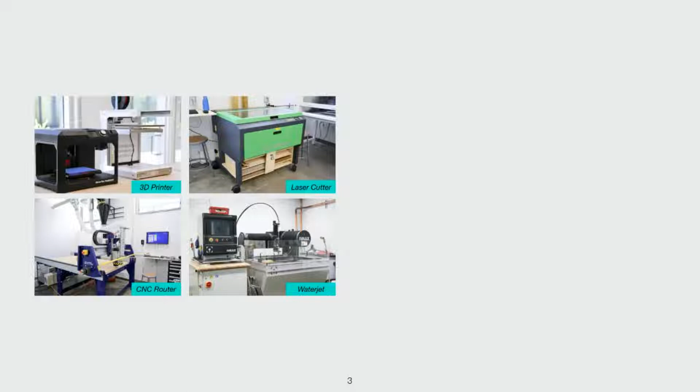So starting with the high-level motivation, the promise of digital fabrication was that given these tools like 3D printers, laser cutters, or CNC routers, plus the imagination that you already had, anyone can make almost anything. These things can be useful, playful, but ultimately it's about being creatively engaged to make these personally meaningful artifacts. And of course, there's practical benefits to this approach as well. Using one of these machines like a laser cutter or CNC router, users can make complex geometries accurately and automatically.

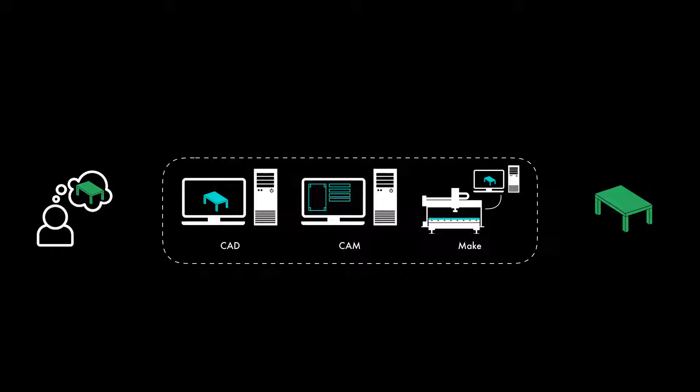But of course, there's a catch. So in order to go from the idea of an object to fabricating that object, a maker must navigate a gauntlet of software packages to first draft a digital model, devise a toolpath for manufacturing, and drive the fabrication machine itself. So these software pipelines are super functional and mature, but they can generate an enormous amount of overhead and friction for communicating design intent to a fabrication tool.

So if you're making 1,000 of the same thing, that overhead is perhaps less of a concern because it can be amortized over all of the copies. But the thing is, this workflow is approximately the same whether you're making 1,000 copies of an object or just one of those objects. So the challenges of using this workflow have motivated a lot of work in digital fabrication research.

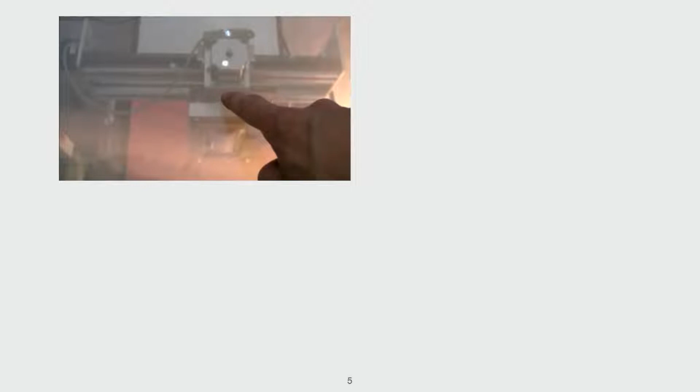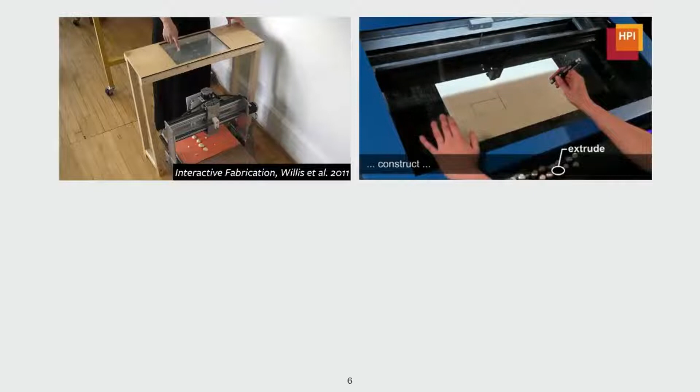Some of the most well-known works in this area are interactive fabrication, which showed how users can directly and continuously interact with fabrication tools. So this was one of their prototypes where a user could use a transparent touchscreen at the machine itself to tell it where to go. There's also interactive construction, which allowed users to design and fabricate assemblies directly at a laser cutter. So users draw with different laser pointer tools to communicate the type of geometry they want to make at the machine.

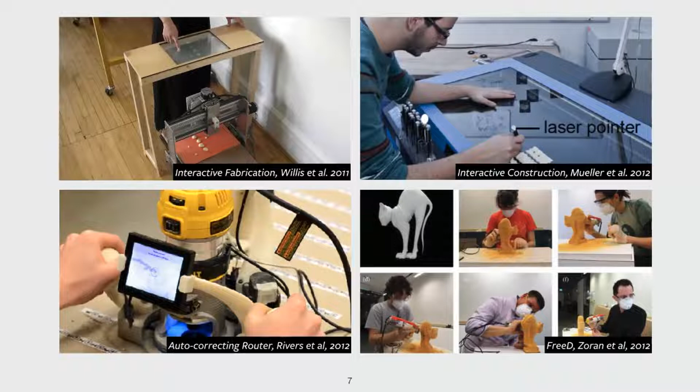And also, there's been research in augmented hand tools that can correct the user's position with respect to a predefined model. So that's been explored both for planar materials with visual fiducials for position tracking, as well as 3D sculptural objects with magnetic sensing and position tracking. And you may be more familiar with the autocorrecting router as Shaper Tools, which is the company that emerged from that research project.

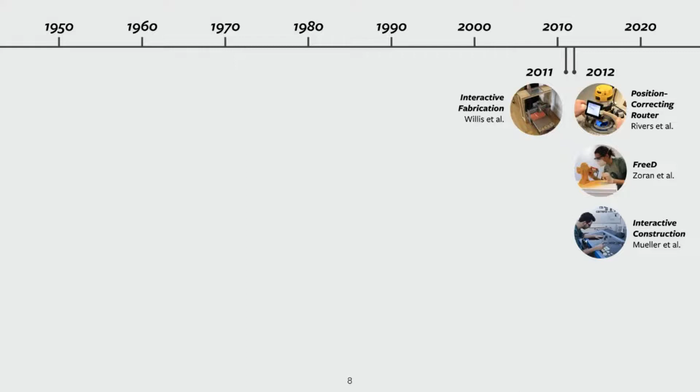So how do you get a punch card to drive a machine? But here, now they're starting to think about what's kind of the precursor to computer-aided manufacturing. So how can those toolpaths be automatically generated or compiled? So with this longer history of digital fabrication in mind, I wanted to call out two pieces of really relevant early work that aren't mentioned very often in the human-computer interaction community.

And this was something that was invented by Hurco in the late 70s. And nowadays, most machine tool manufacturers have some style of this control. And if we look back at the original patent, this technique was, funnily enough, referred to as interactive machining. And as we can see from the description, the inventors of the system were also thinking about how part programming, or the process for defining what and how the machine should fabricate, could be done by the operator at the machine location.

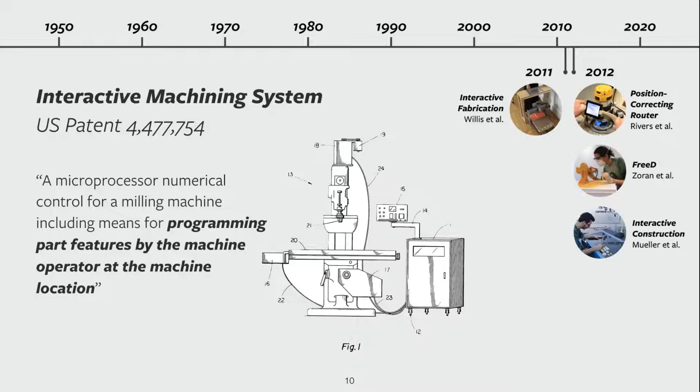The second piece of related work that I wanted to share is something called record playback, which was developed roughly around the same time as numeric control. So this was even earlier in the 1950s. And to me, this is one of the most interesting pieces of related work. So record playback did just that. The system recorded a machinist's actions as they're cutting as a means of generating the toolpaths that can be played back automatically. And because it's a manual tool, the way that you generate the toolpath is more direct, more flexible, and it leverages the existing embodied knowledge of the machinists. And not to mention, you get a part immediately after quote unquote programming the toolpath.

So I think you'll note that there's some pretty fundamental differences between how numeric control, writing punch cards, and record playback approach the question of how to incorporate computation into fabrication tools. So commenting on those differences, James Fallows in his review of Forces of Production writes, with numeric control, machinist skills were devalued and viewed as little more than a series of straightforward operations. But record playback programming was, as one proponent described it, programming by doing.

The program, therefore, was a record not only of the machine and stylus motions, but also of the machinist's intelligence, skill, tacit knowledge, and judgment, which were embodied in those motions. Rather than viewing the possibility of human intervention cynically as merely the chance for human error, this approach viewed it positively as the opportunity for human judgment, skill, and creativity.

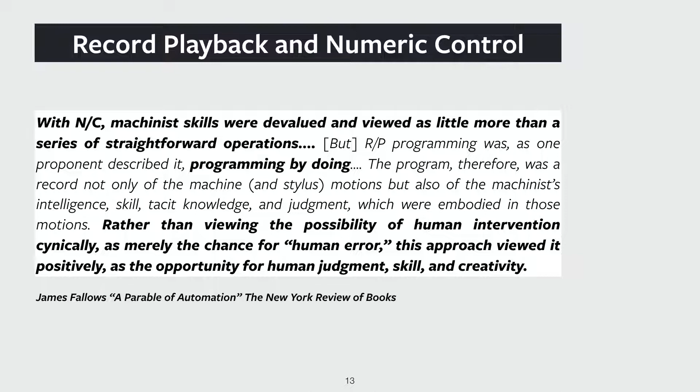So though these projects are not as well known, these early works occupy a lot of the same conceptual territory as these more recent projects. For example, how can a user work with a digital fabrication tool more directly? Or alternatively, how can we leverage the familiarity of hands-on control? And in hindsight, these similarities aren't too surprising. They're all trying to grapple with that same fundamental question around how can or how should users interact with the computation that's being incorporated into these tools.

So moving from related work to my own work, I'm similarly interested in reducing the viscosity of conventional digital fabrication workflows. And to do so, my exploration in this space is guided by this high-level research question: How can digital fabrication tools engage opportunities for human judgment, skill, and creativity during the fabrication process itself? And this question is very much inspired by those earlier hands-on approaches that we talked about.

So this work is not about more intuitive computer-aided design or computer-aided manufacturing tools, nor is it about less opaque machine interfaces, though those are important questions. But rather, it's about how the fabrication tools themselves can be designed to support the fact that hands-on making is this really interesting site of creative exploration and problem solving.

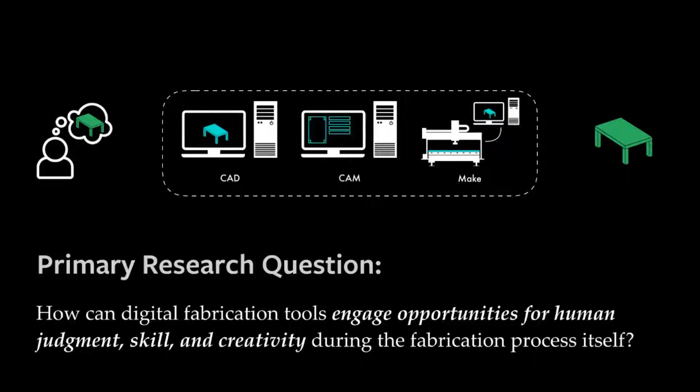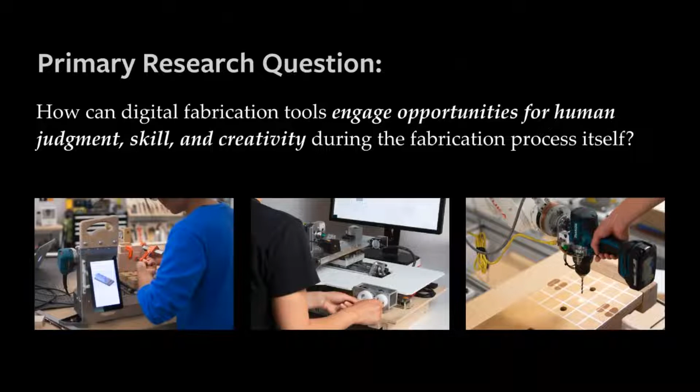And methodologically, I build interactive systems to explore these ideas. And in this talk, I'll share 3 complementary approaches that allow makers to bypass these conventional workflows while still maintaining many of the benefits of digital fabrication.

Okay, I'll briefly check the chat before going to MatchSticks.

So the first project that I wanted to talk about is MatchSticks, a fabrication system that was designed specifically for woodworking joinery. And the main question that guided this work was, how can design intent be more directly communicated to a CNC tool for woodworking? So compared to how we would use other tools in a wood shop, like say a drill press or a table saw, CNC machines and their associated workflows feel uniquely out of place. We were interested in capturing some element of how we can work directly and fluidly with these manual tools, but that doesn't necessarily mean that the tool has to be operated by hand.

And this project focuses on one aspect of woodworking in particular, which is joinery. So many larger wooden objects and structures are made by assembling separate pieces of wood. And as a result, one crucial element to figure out is how exactly those separate pieces of wood will interface with each other.

With those goals in mind, we created MatchSticks. First of all, this work is very much in the spirit of interactive machining. So users can select a joint to fabricate directly at the machine. Second, not only are the interactions focused on joinery, the mechanical layout of the tool itself has also been tailored for the specific constraints of machining joinery. And because we're focusing the capabilities of this tool on local geometries rather than trying to mill out the entire object, it can make objects much larger than the machine itself.

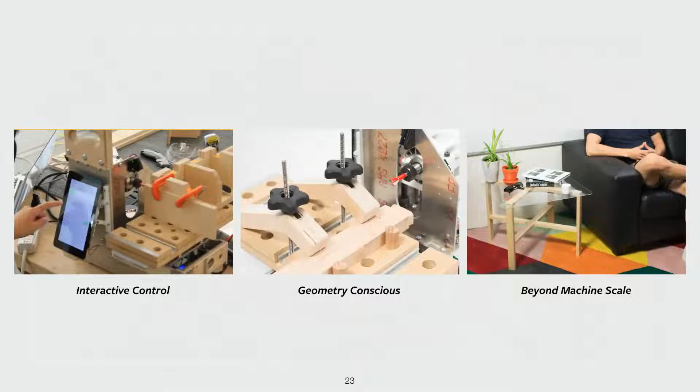And next, I'll go through one workflow for making a box while highlighting some additional details of the system. So in this workflow, we'll start with the design. And we'll notice that we're not in front of a computer because we've abstracted away a lot of the hard parts, such as the joinery. The remaining elements of the design, such as the topology or the dimensions, are fairly easy to keep track of in your head or with some simple sketches.

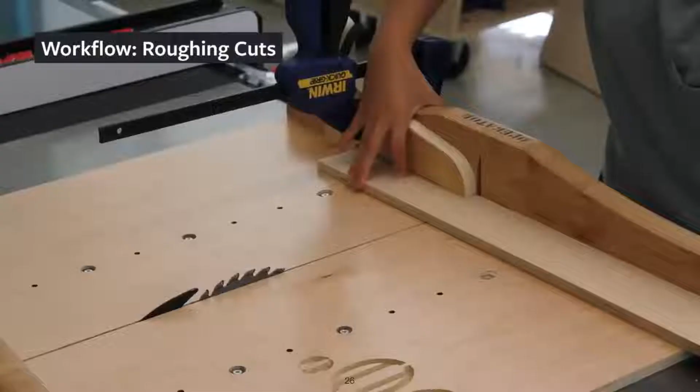Next, our tool is positioned within the ecology of existing woodworking tools. The goal isn't necessarily to replace any one of them, but to aid in one of the most difficult aspects of furniture construction, which is the joinery. An example here is that for a simple cut like this, a table saw is used. There's no need for the complexities of a CNC machine for this simple operation.

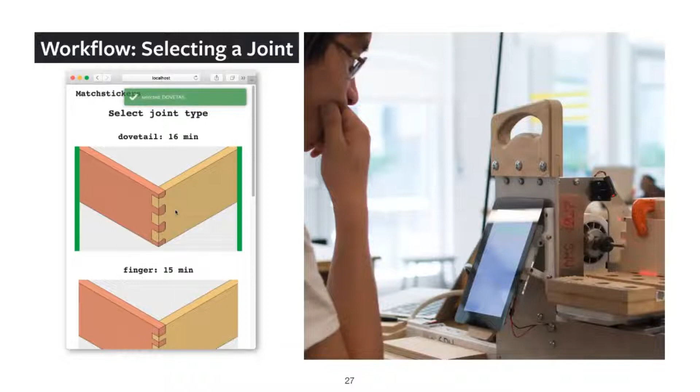And to cut a joint at the machine, the user first selects a joint through the onboard touchscreen. And then once that joint has been selected, the user can mount the material to the machine and start the milling process. So from this angle, we can see the arrangement of the gantry more clearly. Normally a CNC tool for woodworking conjures an image of, say, a flatbed router perpendicular to a really large work surface. But here we have something that's a lot more focused and a lot more geometry conscious.

And finally, because these components can be iteratively created and assembled, the workflow isn't one of get everything as perfect as possible and then hit the play button ideally once, but we can think about how we can interact with this machine incrementally and improvisationally.

Oops, forgot to put the video.

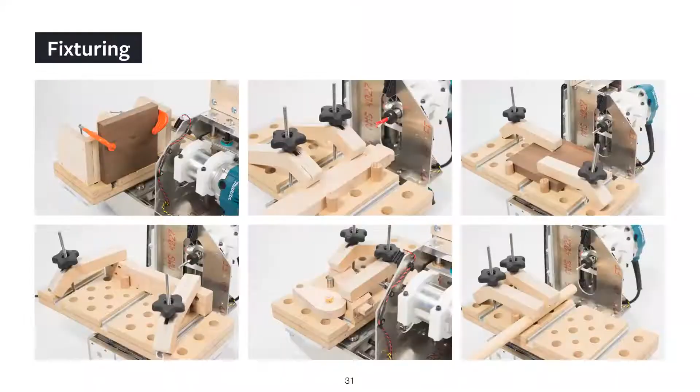One aspect of the system that I wanted to highlight is the fixturing. So there's a really broad range of woodworking joinery, many of which require the wood to be oriented in a particular way with respect to the cutting tool. For example, sometimes you might want to machine on the face of a piece of wood, and this is the orientation that conventional CNC routers like to do.

But other times you might want to machine the end grain or the edge of a wood, as well as in these other configurations. So for example, cutting a contour along an edge, cutting pieces at an angle, or maybe cutting round stock. And as a result of the way that we've designed the layout of the gantry as well as the fixturing, MatchSticks can machine a wide variety of joints, which gives users a lot of flexibility in terms of the topology, like how the pieces of wood are meeting together, as well as in terms of aesthetics and strength.

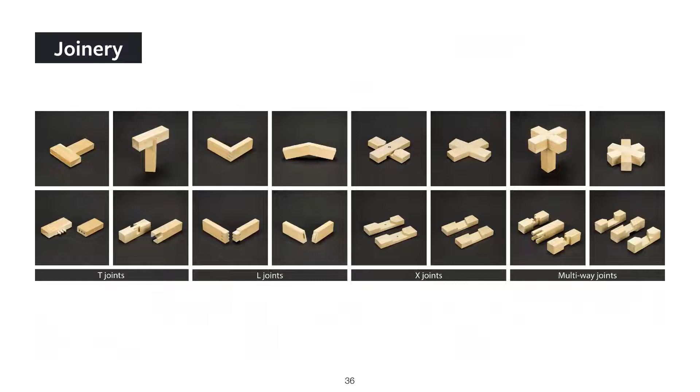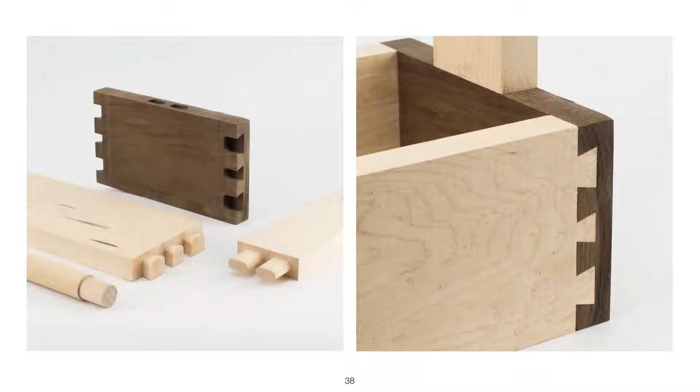Another example that I wanted to show is this toolbox. So to create really precise joinery, the wooden components are typically squared and flattened with these large machines to establish reference surfaces before any of the joints are cut. But here, these pieces weren't fed to those machines, which are called planers and jointers. So instead, when we cut the joint, we can machine not just the joint, but all the surfaces where the joint meets to establish those reference surfaces locally.

To probe reactions to our approach, we conducted a small user study to elicit qualitative feedback about our design. So users were invited to fabricate a simple frame using a more structured tutorial workflow, as opposed to the more open-ended one described previously. In the tutorial workflow, the interface on the machine guided them through making this box, reminding them to keep track of things like reference surfaces, as well as offered in-context fabrication guidance for things like fixturing.

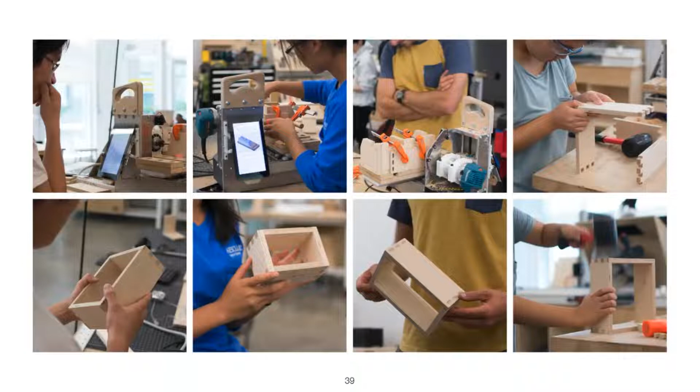And overall, participants responded positively to our tool, commenting on the flexibility of this alternate workflow, as well as how it challenged their perceptions of joinery as prohibitively difficult or intimidating. So in particular, participants with more limited exposure to CNC felt empowered by the tool. One of our users with no prior experience with CNC machines said that, "I feel like I can do so many more things, like it gives me so many more options. I thought that CNC is for when you're older and know more things and understand all the coding and stuff. This is eye-opening because I realized that CNC machines can help me even if I don't understand all of that."

So the complexity of existing CAD/CAM workflows, computer-aided design and computer-aided manufacturing workflows, is both a real and perceived barrier to entry for beginners who want to engage with these machines. And here, the perceived barrier comes from this assumption that working with a CNC tool is somehow this more sophisticated or more fancy way of making.

Participants also commented on how MatchSticks differed from existing tools. So speaking about existing workflows, one of our users who is familiar with both hand tools and CNC tools summed it up succinctly: with digital fabrication tools, you have to have it perfect before you hit the play button. Then comparing our machine with hand tools, the same user goes on to say, when you're doing something with scrap materials, you end up changing things here and there as you move through it. So hand tools, and maybe MatchSticks a little bit as well, you're working with what you have as you move along. It really is an in-between. It's quick like a hand tool and it's empowering like the CNC.

And enabling this type of workflow that can be improvisational and serendipitous was really one of our main goals. CNC machines are no doubt super powerful, but there's definitely ways of engaging with their capabilities outside of established workflows.

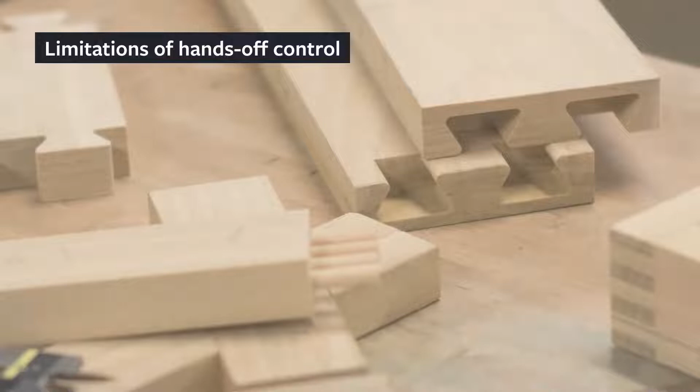But of course, there's limitations to this approach. While many users felt empowered by the tool, there was also a sense of detachment that came along with having the machine do most of the making. For example, P1, who had a little bit of prior experience with CNC tools, said, the design is in my control, but the process is not, which is good or bad, depending on who can do the process better. In this case, it's definitely the machine. I do feel a little out of control of the fabrication process.

So I think this picture kind of succinctly summarizes that feeling, as well as some of the opportunities that I was interested in exploring for the next project. So first of all, MatchSticks was really focused on allowing users to directly articulate design intent. But after a user has specified a geometry, they just kind of sit back and watch, much like a standard CNC tool.

Fabrication machines are these omnipotent tools that can make anything you tell them to do, but they can also be a rich source of feedback about the fabrication process. So instead of thinking only about how to allow users to directly articulate design intent, how might users more directly perceive the capabilities and constraints of the fabrication system? So in other words, how can we go from thinking only about control to also thinking about feedback? In addition, we achieved directness in MatchSticks with a set library of geometries, but how might we support users in the creation of open-ended geometries?

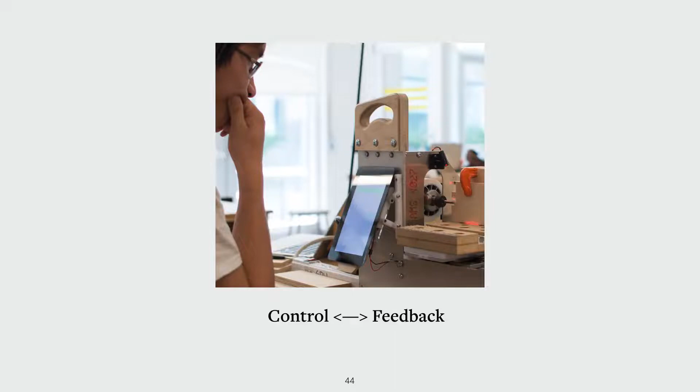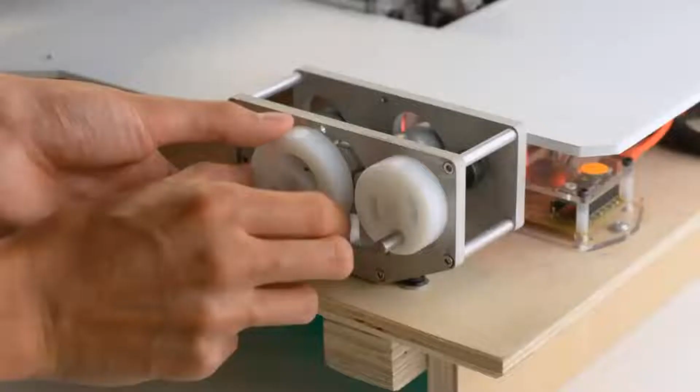The triangular object, the cutting tool, translates on a 2-axis gantry to shape the stock material to the desired shape. And here I'm using one of these dials or hand wheels to control each axis of the gantry. So when I turn that hand wheel counterclockwise, the tool moves right to left.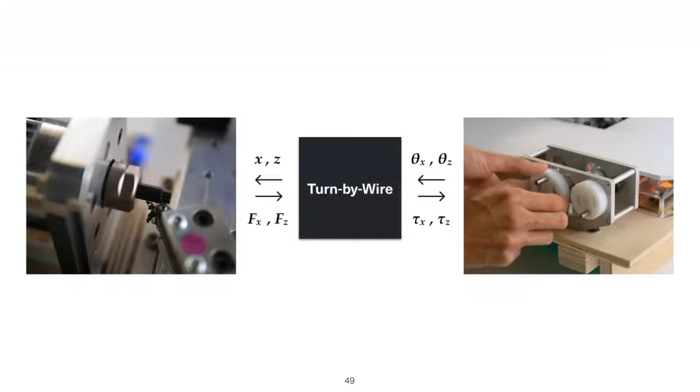So the main idea behind our system is to keep the manual control, but then have the coupling done by wire. So instead of a physical coupling, like a mechanical transmission, we can create a programmable coupling through software. And that coupling is bidirectional. So the hand wheels that the user is interacting with are actually haptic controllers. So using those controllers, the user can control the lathe, but they can also feel different types of force feedback.

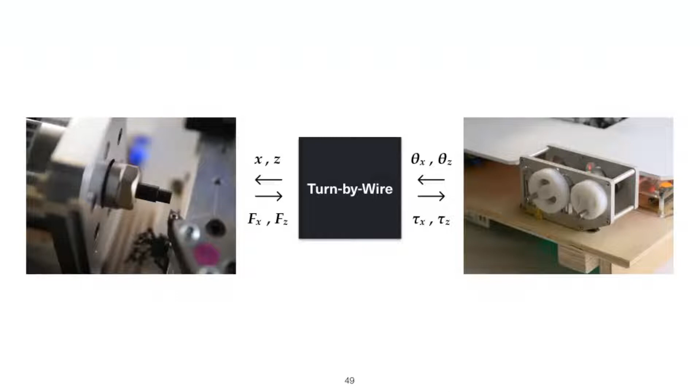And because these hand wheels are a pretty specific interaction modality, we complement that with a general purpose graphical user interface for things such as tool selection or modifying settings. So we leveraged this turn-by-wire architecture towards 3 primary themes. The first is intent. So how can design intent be expressed more concisely? How can we capture the most salient aspects of what the user is trying to make?

The second theme is complementary, the inverse of the first, which is about perceiving state. How can users understand how the work is progressing? As I've mentioned before, fabrication tools aren't just these static objects that we can impose design will upon, but they can and should also inform us about their capabilities and constraints. Lastly, we have scaffolding, which is a more specific type of feedback. How can the tool inform the user about technique? In other words, how can the tool teach the user how to use it?

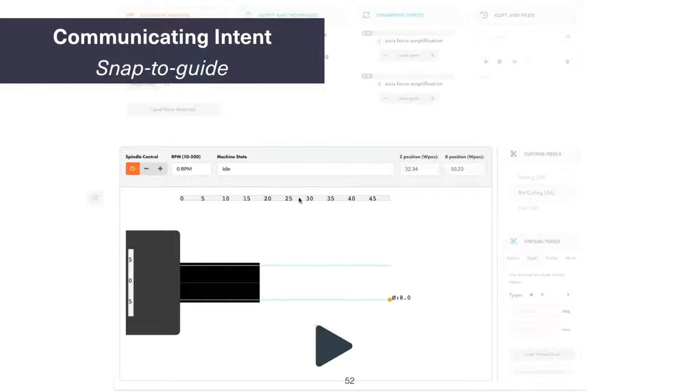So the first interaction that I wanted to show you all was snap to guide. So in our system, users can set virtual haptic guides through the graphical user interface. And then with the hand wheels, they'll physically snap into these guides when the tool approaches the predefined dimension. And here we intended this as a lightweight way of capturing something that we only associate with digital fabrication tools, which is automatic accuracy.

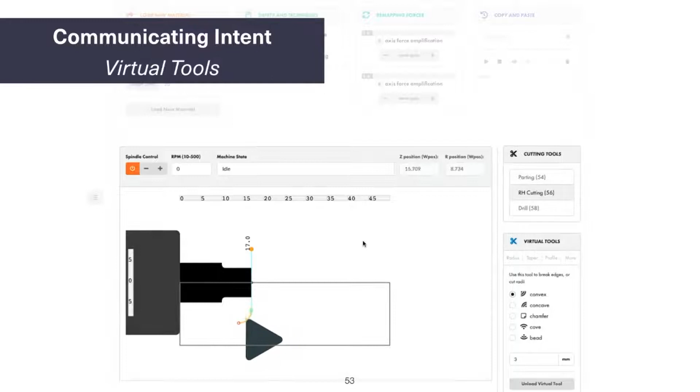Next, if you want to cut something like a radius on our system, you can use a virtual tool. So when the virtual tool is activated, a single hand wheel can move the tool along an arbitrary path rather than its designated axis. So instead of using a special jig, or coordinating multiple inputs simultaneously, or grinding your own lathe tools, if that's something you're interested in, we can remap the coupling between the hand wheel and the lathe in software to expose the controls that most succinctly capture the most important aspects of the design.

And we've also revisited record playback. And here we've implemented an interaction similar in style to some end user automation tools, for example, actions in Adobe Illustrator. So after the action has been recorded, the toolpath can be reviewed and played back. This way, if you need another copy or made a part in a way that you really like, you don't have to repeat yourself.

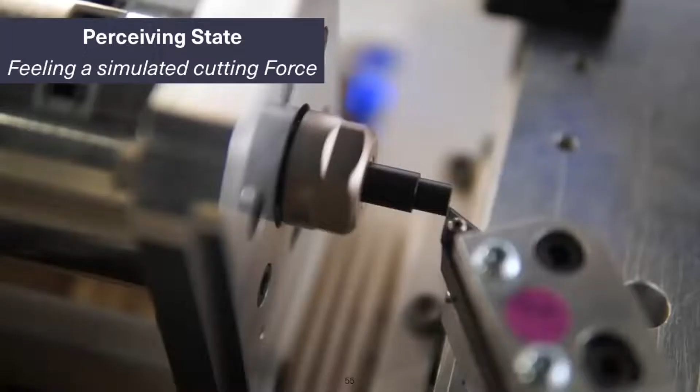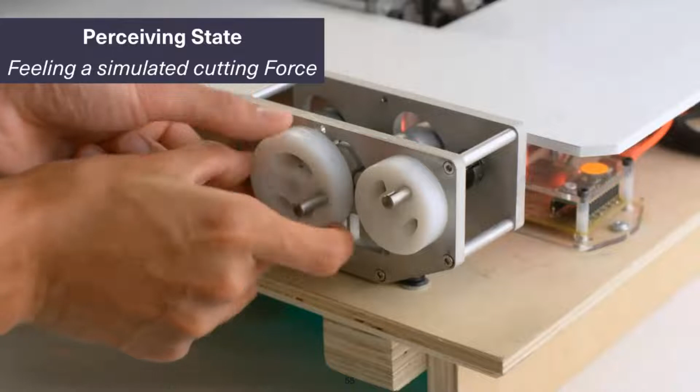The second theme is state. So state can be communicated continuously through haptics. While cutting, users not only control the position, but they feel a simulated reaction force proportional to the amount of material that's being removed. And the reasoning for this is that the first indication that something might be going wrong shouldn't be that the tool breaks or the part is ruined, but that you should be able to feel that change immediately. And because the coupling is done through software, it's not fixed. So if you're using a super delicate cutting tool, you can crank up the gain of the force feedback.

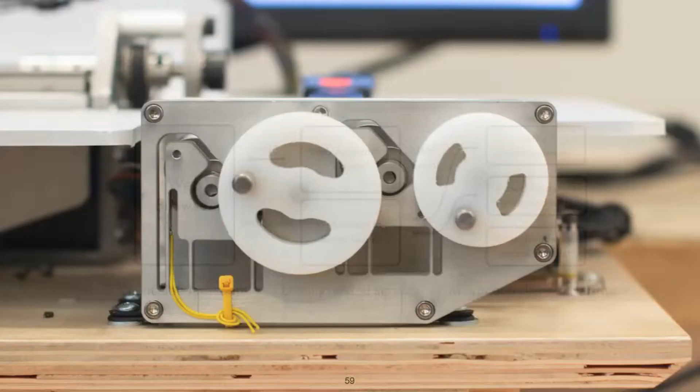In terms of the hand wheels themselves, the mechanical design references the configuration found on traditional lathes. And for the haptic controllers, a motor with an encoder is acting as both the sensor and actuator. For the haptic rendering itself, we're using a combination of electronic braking for passive force rendering, as well as impedance controller for the active feedback. So for things such as the snap-to-guide.

To probe reactions to our system, we recruited 5 expert fabricators to create the simple component using turn-by-wire. So the participants were recruited from the staff of an educational makerspace. The component was designed to expose users to all of our haptic interactions. And all 5 participants successfully created this widget within 15 to 20 minutes after a 15-minute training period. And next, I'll briefly share some of the highlights from the semi-structured interviews that we conducted after they used our system.

So one of the interactions that the participants liked the most was snap-to-guide. And here P5 said, the ability to set the limits so you don't cut too far actually helps you make the exact dimensions you want. That sets it apart from any other machine. Just a manual machine or digital readout, a DRO, doesn't physically stop you from going past those limits.

Many of the participants were also surprised by how easy it was to learn. So P1 said, it was a lot more comfortable than I expected because in the beginning you told me it's kind of a CNC and I thought the learning curve is going to be bigger than what just happened today. And this was a sentiment that was echoed by many of the other participants. So even for some expert users who are really familiar with CNC machines, they don't necessarily think of learning a new CNC controller as a straightforward task.

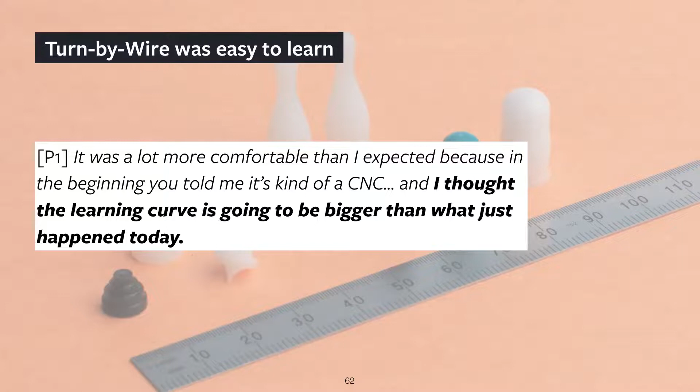Lastly, is turn-by-wire a manual tool or is it a CNC tool? This question prompted a range of responses from our participants. 2 participants thought that it was closer to a manual tool because of the hands-on interactions required. 1 participant thought that it was more of a CNC tool, noting that under the hood, the system is in fact a CNC lathe. The remaining participants were somewhere in the middle.

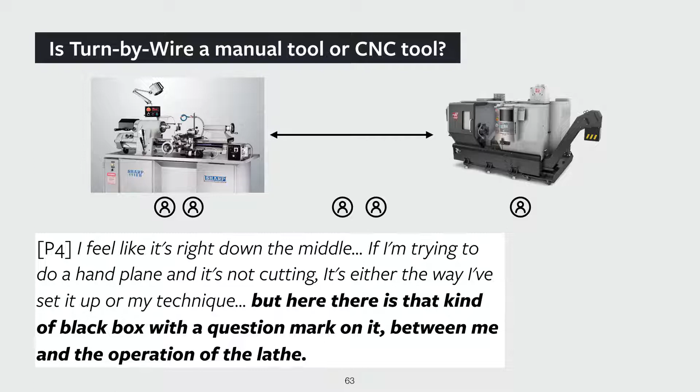And P4 on this topic said, I feel like it's right down the middle. If I'm trying to do a hand plane and it's not cutting, it's either the way that I've set it up or my technique. But here there's that kind of black box with a question mark on it between me and the operation of a lathe. And I completely agree with this sentiment. The by-wire architecture enabled these new interactions that we chatted about, but to do so, the trade-off was that we have to introduce some ambiguity compared to how a true manual tool is used.

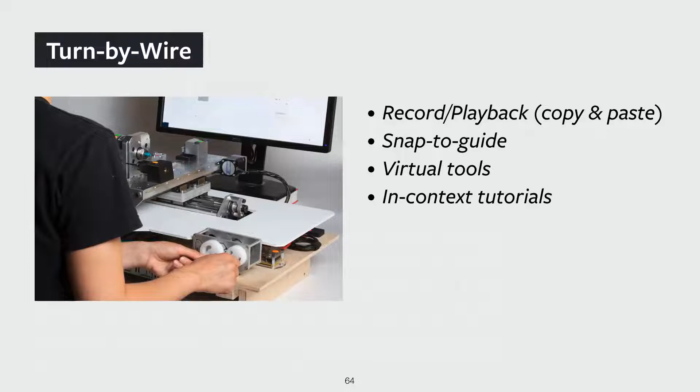So to summarize, the architecture of turn-by-wire enabled interactions such as record playback, which we can think of as copy and paste, snap to guide, virtual tools, and in-context tutorials. So I think these interactions sound slightly familiar because another way to think about them is that these are actually the capabilities we associate with digital editing, but now applied directly to a physical editing task.

And I want to emphasize 2 things. So if we extend this idea forward, there's many other digital editing capabilities that can be explored. For example, things such as undo, redo, maybe autocomplete, or editing the recordings, either manually or automatically. But the other thing is, instead of by-wire control for a single tool, how might we digitally mediate the control of any tool? So imagine having something like snap to grid, but now for any one of these fabrication tasks on the left.

A piecewise approach is possible. So for each tool that we're interested in augmenting, we can develop a system around that tool. However, an alternate approach that's perhaps more extensible is to augment the user and the fabrication environment directly. And that idea is the motivating concept behind the most recent work, aDroid. So rather than augment each tool individually, we can use a robot arm to mediate how the user controls any tool.

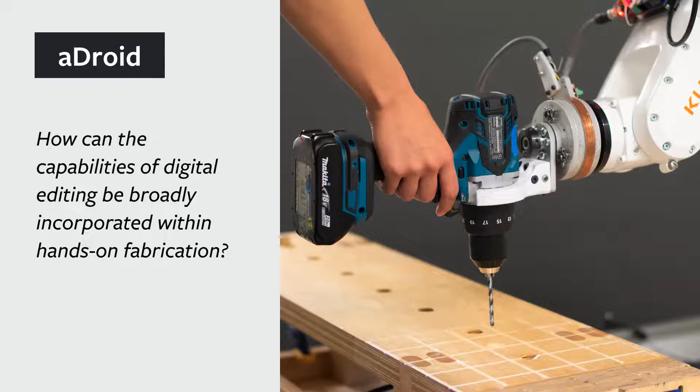And more specifically, how can the interactions that emerged from turn-by-wire be extended? So how can the capabilities of digital editing be broadly incorporated into hands-on fabrication? So the approach is inspired by physical jigs and fixtures, which support users by selectively constraining the many degrees of freedom in our bodies. For example, a miter saw constrains the handsaw to move accurately within a plane, and a drill press, or in this case a drill jig, constrains the motions of a drill to move only along a line. So to help us reduce the number of degrees of freedom in our bodies, a variety of context-specific jigs can be used, depending on which degrees of freedom you want to constrain.

So the main idea is that with aDroid, the robot can render fixtures virtually. So robots are typically useful because we can tell them what to do, but here we invert that. It might be equally interesting and potentially easier to tell them what not to do. So here, the toolpath is not predefined. So as I'm trying to move the tool, motions are generated on the fly as the system responds to my applied forces and the current constraint. And the compliance of the robot can be tailored to the task at hand. For example, when we want to drill, as opposed to just moving the drill around, we can get the robot to constrain all of the motions to be along the axis of the drill bit.

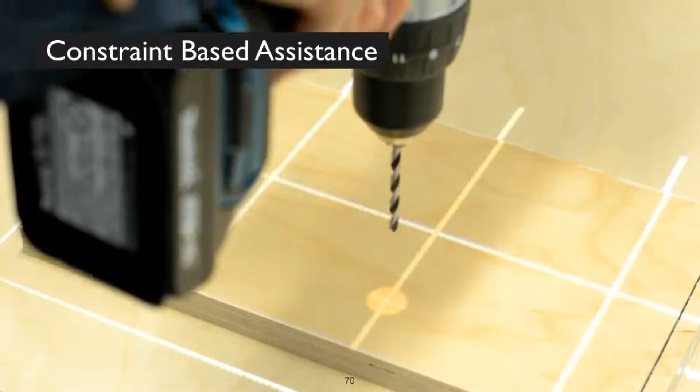And here we're seeing one of the other features, which is snap to grid. So in terms of the lines that we're seeing, those haptic interactions are complemented by a projection augmented reality interface, which in this case is offering in situ visual feedback about the tool's position.

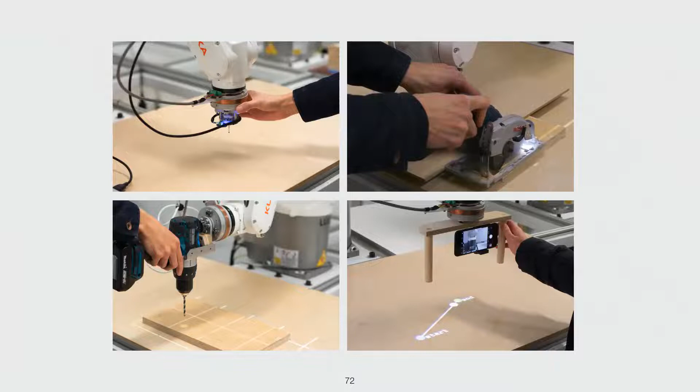To demonstrate a range of interactions, I'll show 4 tools that we prototyped with aDroid. And each of these tools will highlight a specific part of the system. For example, with the measurement probe, I'll show how the initial correspondence between the physical and digital models can be established. With the track saw, I'll show how the system can record a user's fabrication process. With the drill, I'll demonstrate how accuracy can be borrowed from an industrial robot during manual fabrication. And lastly, with the camera rig, I'll show how users can define custom constraints to tailor the system for their tasks.

So the first one that I want to start with is a drill. So to use a hand drill with our system, the user selects that option through the graphical user interface and mounts the tool to the robot. After the drill is loaded, the AR system projects crosshairs onto the table to show where the drill is pointing. When the drill nears one of the virtual grids, it will physically snap to the grid, like a haptic controller.

When adjusting the orientation of the drill, the AR view visualizes the current heading and elevation. And for precise drilling, the user can press the latching button to constrain the drill along the current axis of the drill bit.

And here, the user is working with that measurement probe. So the probe tool can be used to directly measure the location of objects. When the tip of the probe contacts an object, the robot automatically retracts the probe to the safe position. So the probe tool can be used to locate specific types of geometries, in this case, the edge of a workpiece.

For the track saw, the robot guides the intermediate tool, the track. So the stock material is mounted to the workbench using double-sided tape. And the AR view is projecting where the cut will occur relative to the track. Before cutting, the user presses the lock button on the ruler. And then the cut can occur when the ruler is locked onto the surface of the workpiece.

After a cut has been made, the AR view displays the distance between the last cut and the current position. And the user can also navigate the history of previous cuts, like a lightweight CAD model.

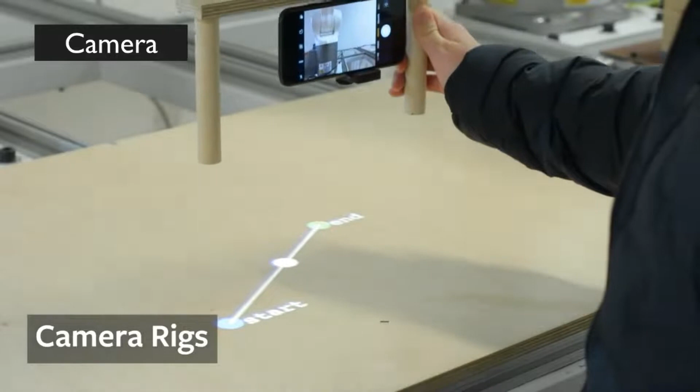Lastly, camera rigs, such as cranes or sliders, can also be thought of as jigs and fixtures, mechanisms which selectively constrain the motion of a tool. So to define a virtual slider, the user first moves the camera to a desired start position and sets that position using a graphical user interface.

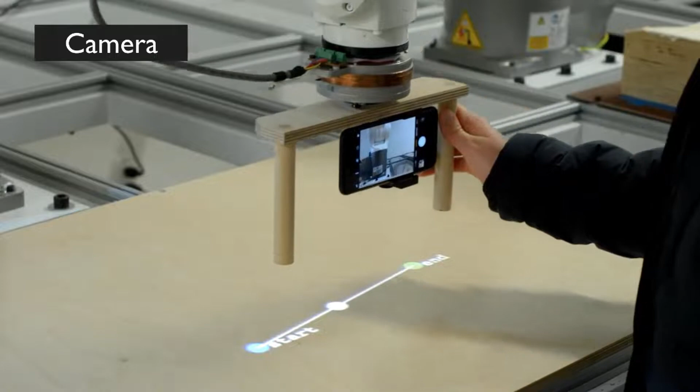The projection augmented reality view displays the X and Y position of that start location, as well as the current location of the camera. After setting the end position in the same way, the rig is ready for use. All of the user's motions are now constrained to go along that virtual slider.

So I want to emphasize that the specific interactions we demonstrated can definitely be mixed and matched. For example, the ruler tool can be equipped with snap to grid, or the drill tool can be programmed to remember all of the previous holes that have been made. But for the sake of breadth, we chose just to demonstrate one aspect of the system with each tool.

And here I'll briefly talk about how the system was designed and implemented. In terms of the high-level description of the software architecture, there's one main server which choreographs the interactions. All of the UI elements, including the projection AR view, are rendered in the browser. The main server, as expected, is also communicating to the KUKA's control cabinet, as well as the custom electronics on the wrist.

So similar to turn-by-wire, the code for interactive control is sitting on my laptop rather than inside the KUKA's control cabinet. And the main motivation is similar as well. We want to offload the code for these interactions away from the low-level KUKA programming language.

Another important part of the system is the force torque sensor, which is central to all of the interactions I've described. So these sensors can cost upwards of $5,000. So not only are the costs of the robots themselves prohibitive, so are all of their accessories. So I was able to make one for under $100 with standard makerspace tools, which achieves similar resolution as commercial sensors.

So I developed the sensor only as far as to support the interactions described in this project, and there's definitely room for additional refinement or characterization. However, we're hoping that the sensor architecture can act as a viable starting point for other researchers who want to explore haptics or just force-based interactions in general.

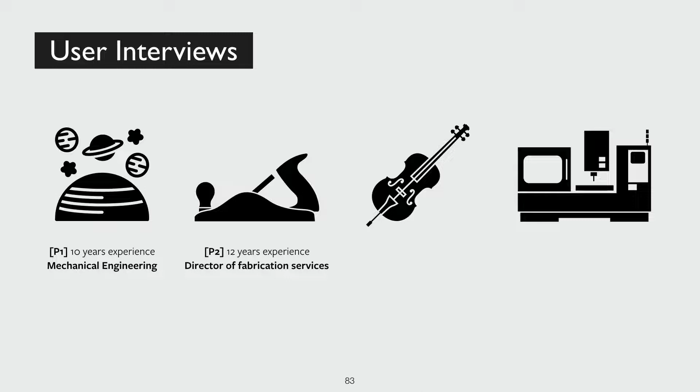So unfortunately, we weren't able to have any in-person user studies due to COVID-19, but we did conduct 1-hour interviews with a small group of experienced fabricators across 4 different domains. The interviewees we recruited were a mechanical engineer who has worked on underwater and aerospace vehicles, a director of fabrication services at a campus makerspace, a luthier or someone who makes stringed instruments such as violins and cellos, as well as the owner of a contract manufacturing shop.

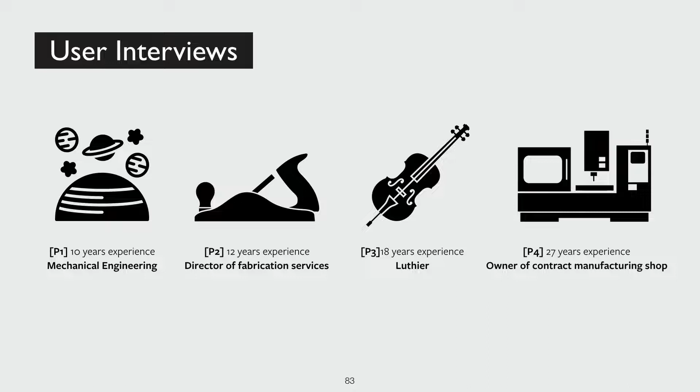So on average, these interviewees had 17 years of fabrication experience across both manual and CNC tools. During our meetings, we showed them the videos of the interactions, and we conducted a semi-structured interview to elicit high-level feedback about the design. So the concept of having virtual jigs and fixtures quickly resonated with the luthier and fabrication shop director, both of whom have significant woodworking experience.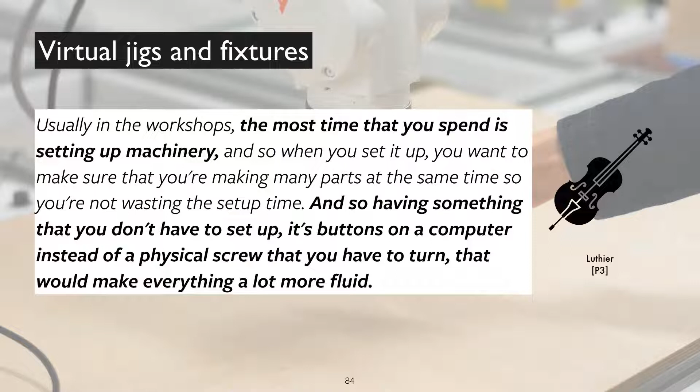So on this topic, the luthier said, usually in the workshop, most of the time that you spend is just setting up the machinery. So when you set it up, you want to make sure that you're making as many parts at the same time so you're not wasting the setup time. And so having something that you don't have to set up, it's buttons on a computer instead of a physical screw that you have to turn, that would make everything a lot more fluid.

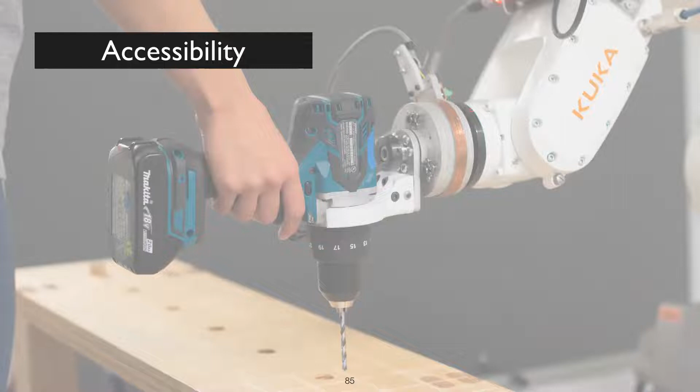The fabrication services director interacts with a lot of students regularly. And one thing that they were most excited about this work was how it could make power tools more accessible in terms of confidence and safety. So this allows anybody, shape, size, age, whatever, the ability to do these things on their own. For me, that's the most attractive sell, regardless of precision, quality control, and all that stuff. For me, it's a matter of empowering users.

So in particular, P2 was thinking about the physical weight of the drills, as well as the kickback that they can potentially generate if you were to hit a knot in a piece of wood or a nail or something like that.

In addition, the participants proposed a wide range of scenarios for applying this concept forward. For example, with painting or carving with a router, as well as secondary operations, so like reaming, tapping, or installing threaded inserts. They were also excited by the idea to use the projection system to visualize how to lay out a design, as well as using it for kind of redundant tasks like sharpening tools.

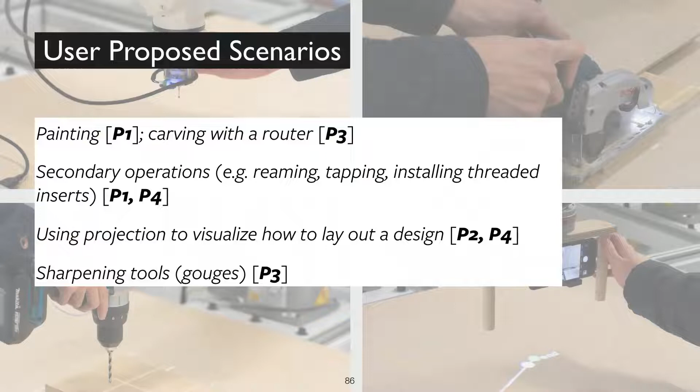To summarize, I wanted to emphasize the benefits of having a, quote unquote, virtual drill press. First, settings for the drill press, like the drilling angle, can be rapidly and accurately set or restored. Next, not only can it constrain the motion of the tool, it can also mediate forces to generate sensations like snap to guide in the real world.

Also, similar to turn-by-wire, because all the interactions are mediated through software, the drill press knows where and how holes have been created. So when the user is directly fabricating with the tool, they're generating the same kind of data that would be generated through computer-aided design and computer-aided manufacturing workflows. And lastly, the drill press can be reconfigured to become other jigs through software.

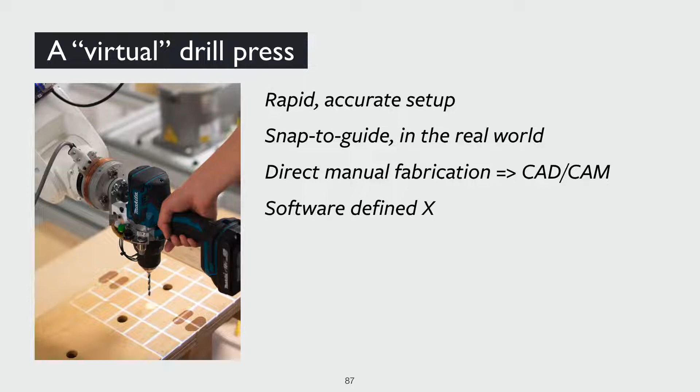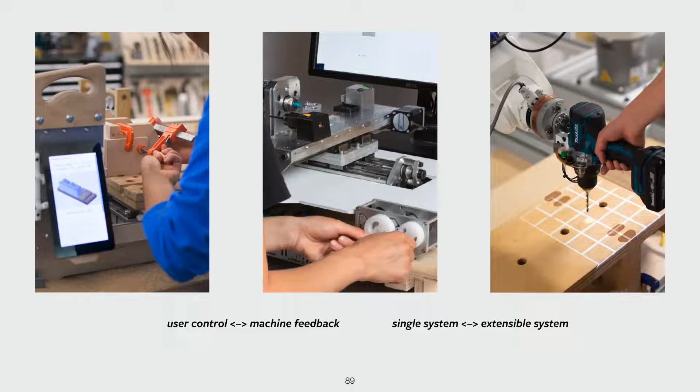So where do we go from here? With the three projects, we saw how conceptually they pivoted off of one another. For example, whereas MatchSticks was focused on user control, we then considered the opposite with turn-by-wire, machine feedback. And next, both turn-by-wire and aDroid were thinking about digital editing capabilities for hands-on fabrication. But whereas one realized this idea in a single tool, the other thought about it in terms of an extensible system. And I think there's many exciting ways to explore this space, and I'll present two of those potential pivots.

So the first is to take MatchSticks away from this turn-taking conversational style control to continuous control. And of course, we can experiment with things like hand wheels, like turn-by-wire, or direct hands-on control, like aDroid. But it would also be interesting to explore different ways in which continuous control can be abstracted. So what I mean by that is, what if you could machine with MatchSticks using like a 3D mouse, or a game controller, or even that same touchscreen tablet?

So because the control is done by wire, there's no physical limitation in terms of the form factor of the controller itself. And with any one of these controllers, we can have similar support from features like Snap to Grid or virtual tools so that we can still create accurate complex geometries.

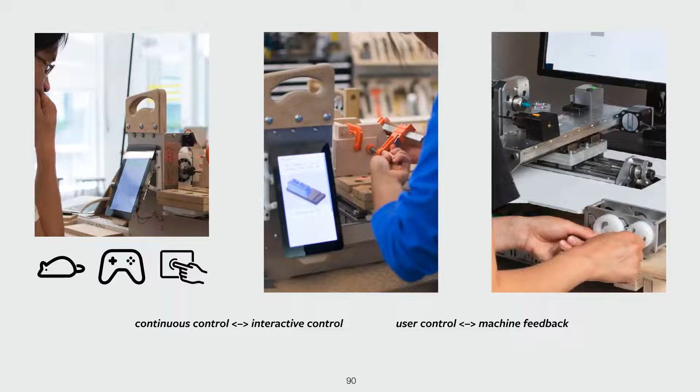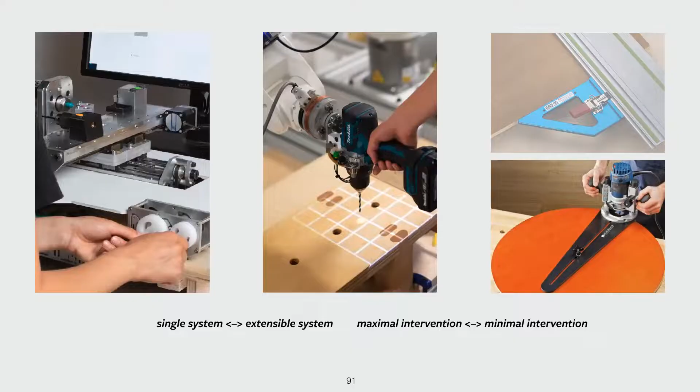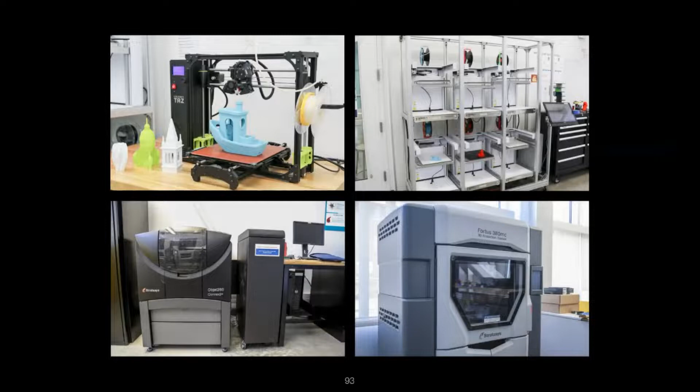So here I wanted to back up a little bit to the high level motivation behind the work. So in the same way that 3D printing software slicers have a draft setting versus a high quality setting to suit different situations and constraints, or that a makerspace might have many different types of 3D printers that span different fidelities, materials, or requirements, the interactions and workflows for digital fabrication tools can be similarly diverse.

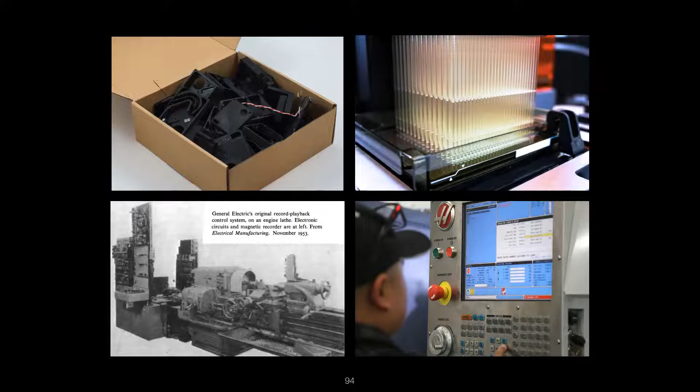So the workflow for making many different objects with a fabrication tool doesn't have to be the same one as the workflow for making many of the same object. And the tool interface for skilled machinists steeped in tacit knowledge doesn't have to be the same as the one for someone who's more familiar with computer-aided workflows.

In this talk, I demonstrated three alternative ways for engaging with digital fabrication tools, which looked at how interactions that look like hands-on making can achieve many of the advantages of digital fabrication, or have the characteristics of digital editing.

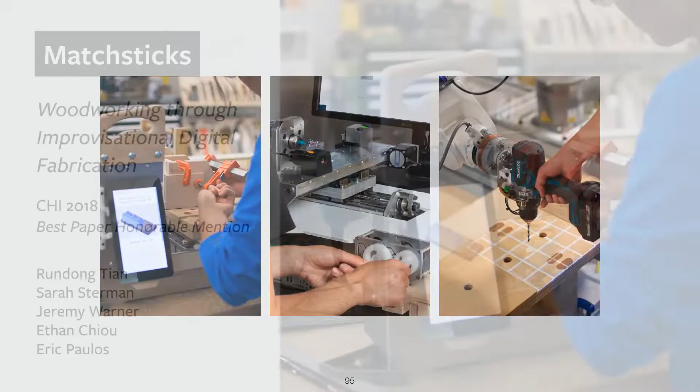With MatchSticks, the contribution was a new style fabrication machine designed specifically for one of the most important building blocks of furniture, joinery. And the way that you interact with these capabilities is in a way that's more like a manual tool, like a miter saw that cuts joinery, rather than a CNC tool. And this draws inspiration from conversational machining, and we've applied it to a domain that's really well suited for a parametrized library of geometries, joinery.

And with turn-by-wire, the novelty is definitely not the tool itself. Lathes are one of the oldest tools invented by humans. But how we interact with that lathe is unique. So during fabrication, the force feedback communicated by the lathe conveys additional layers of information that go beyond the literal or real forces that are felt. And separately, but overlapping with haptics, we've created a physical fabrication system that supports editing capabilities we typically associate with digital editing.

And lastly, with aDroid, I showed how a robot can support the process of hands-on fabrication with virtual fixtures and jigs. But not only that, these virtual fixtures allowed us to inject capabilities of digital editing that we saw with turn-by-wire, like Snap to Grid, within hands-on making more generally.

So collectively, I just want to emphasize that these techniques are not meant to replace any existing interactions or workflows. Much in the same way that a high-end 3D printer for superfine surface finish doesn't replace the desktop printer for on-demand iteration. Instead, there's a lot of opportunities to think about how not only can the capabilities of digital fabrication tools be flexible and adaptable, but so should the ways in which we interact and engage with those capabilities.